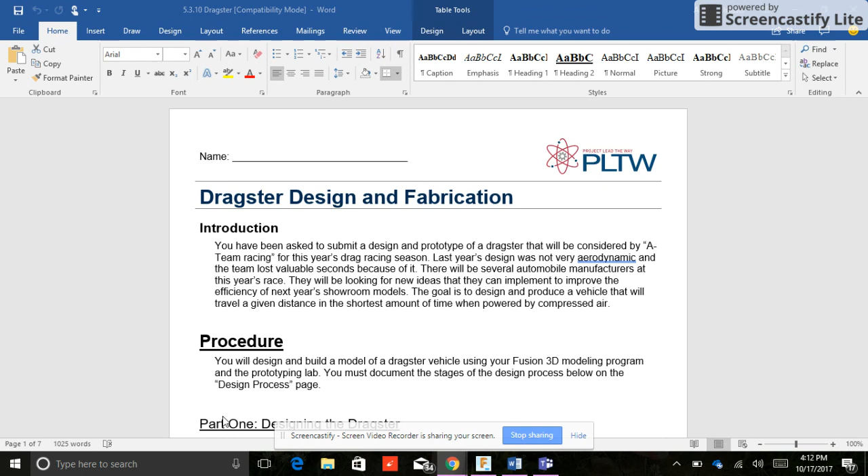So we're going to go down through our design brief. Your client is A-Team Racing. The designer is you. The problem statement is last year's model was not aerodynamic and lost valuable seconds in the race. The design statement is you're going to design a more aerodynamic dragster.

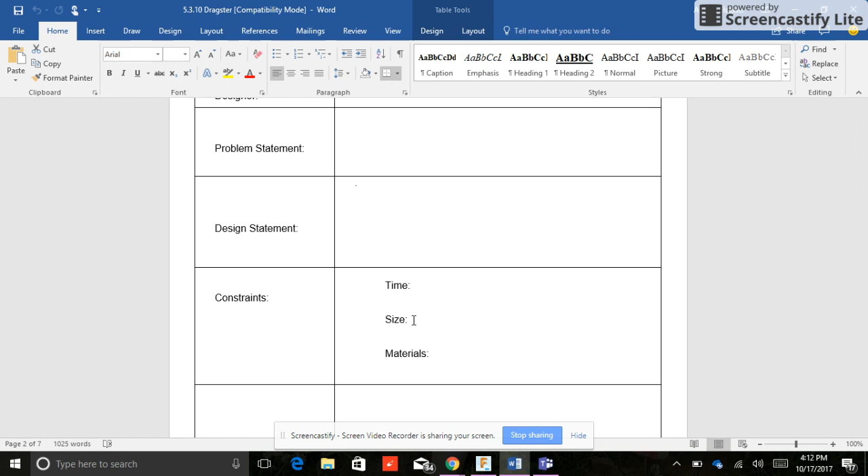Your constraints for time should be less than 2 weeks, should take you to finish this project. The size should be as small as possible because smaller is lighter and we want to be aerodynamic. And the materials are 1 block of pine wood, a couple axles, and a couple wheels.

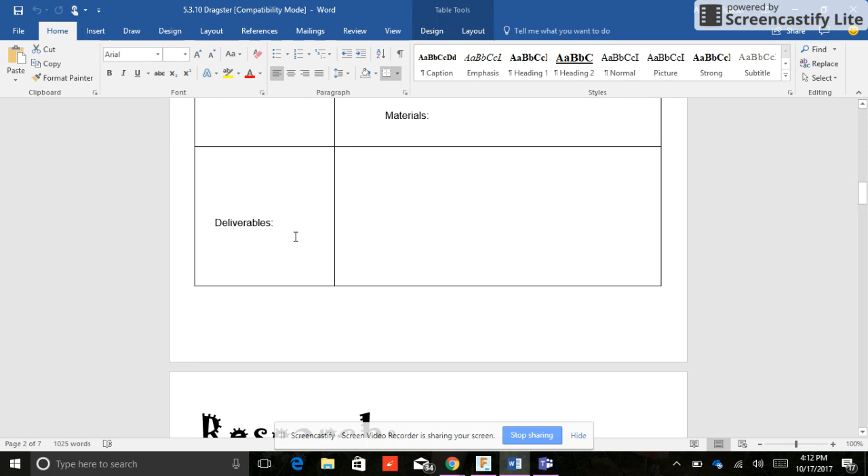So the deliverables, same as your other projects. You're going to make a concept sketch, you're going to make a 3D model in Fusion, and then you're going to build a prototype out of wood.

For research, copy and paste the URL of every website you look at. Either copy the picture or write a description of what you looked at to go with the website. If you don't have that description or a picture to go with the website, you're not going to get any credit for just posting the website. You have to document what you got from that website.

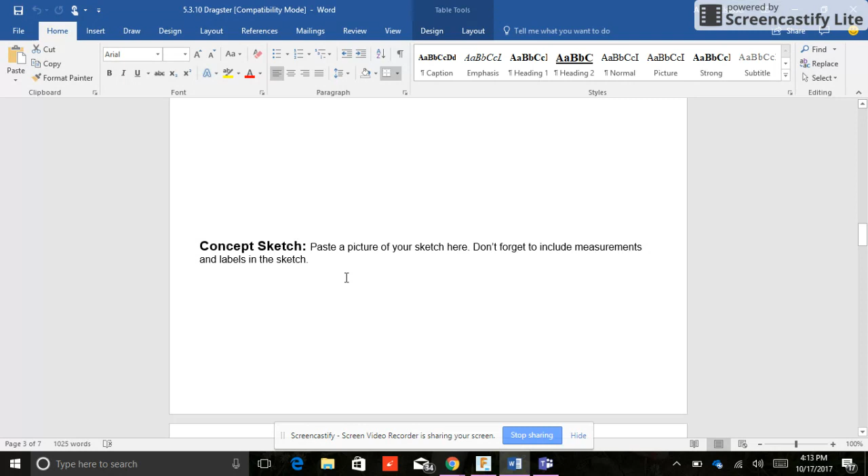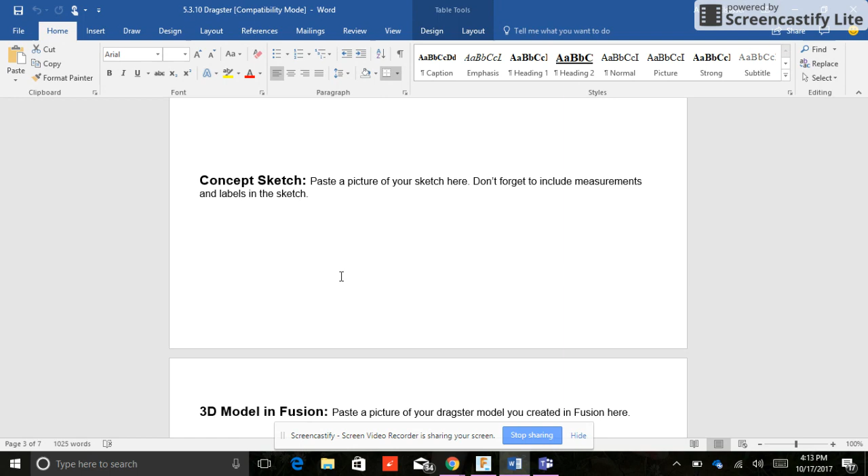Your concept sketch. After you have 4 or 5 different ideas up here under research, get a piece of graph paper, get out a pencil, sketch the dragster you want to build in Fusion and out of wood. Sketch it, give it some measurements, approximately how big do you think you want to make it, and then copy and paste a picture of your sketch here.

What I'm going to talk about now is your 3D model in Fusion and your dimension drawing. So I'm going to be going back and forth between this specification sheet, all these measurements. Some of these measurements are required. Some of them are recommendations. So we'll talk more about that in just a minute.

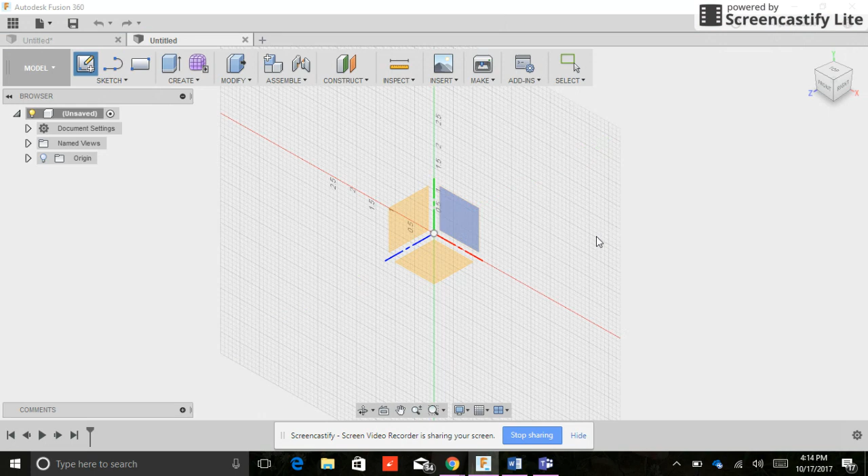Let's get into Fusion and start a sketch on the XY plane. I'm going to start with a rectangle. So R for rectangle. I want my height to be 1.25. And I'm going to click Tab on my keyboard, and I'm going to type 7 for the length. So I've got a 1.25 by 7 rectangle, and I'm going to hit E for extrude.

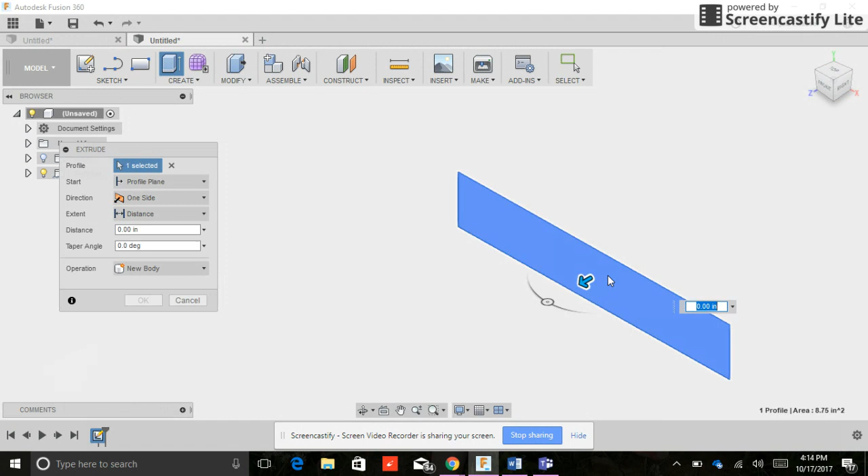When I extrude this, I'm going to extrude at 0.75. That is going to be the depth of my dragster.

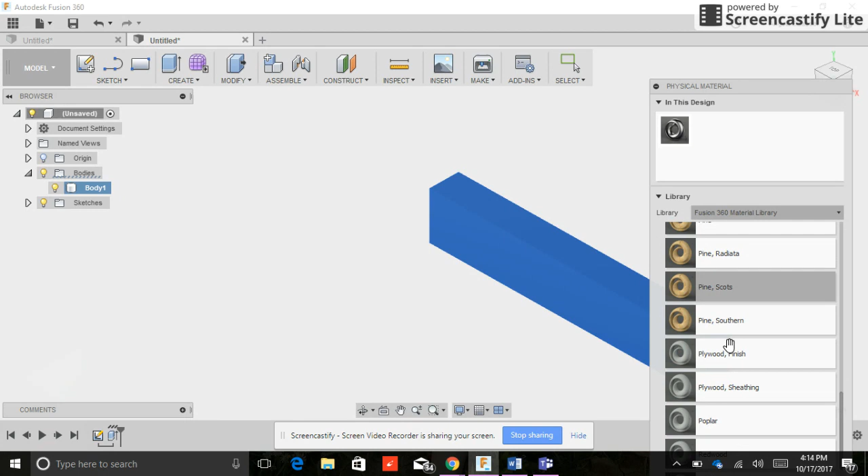Now, just to make it look more like our project, I'm going to open up my bodies, and I'm going to right-click body 1, and I'm going to go to physical material. When my physical material window opens, I'm going to go down here to wood, and I'm going to scroll down till I find pine. The dragster we're going to be building is going to be made out of a piece of pine wood. So there we go, pine.

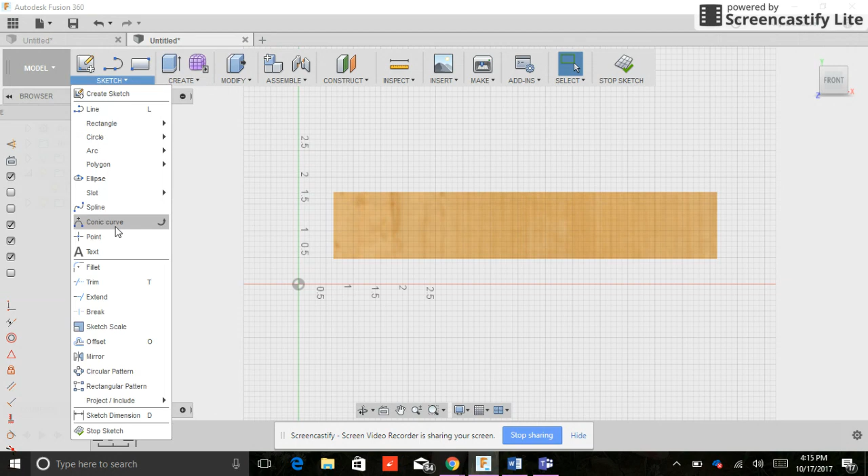Okay, now to cut my dragster out of this, I'm going to put a new sketch on top of the front face, and I'm going to use my spline tool, and I'm going to make a curved shape, and I want to make it kind of small. Then I'm going to use my line tool to come straight down on the back end, straight down, and then I'm going to come straight over to make my dragster shape.

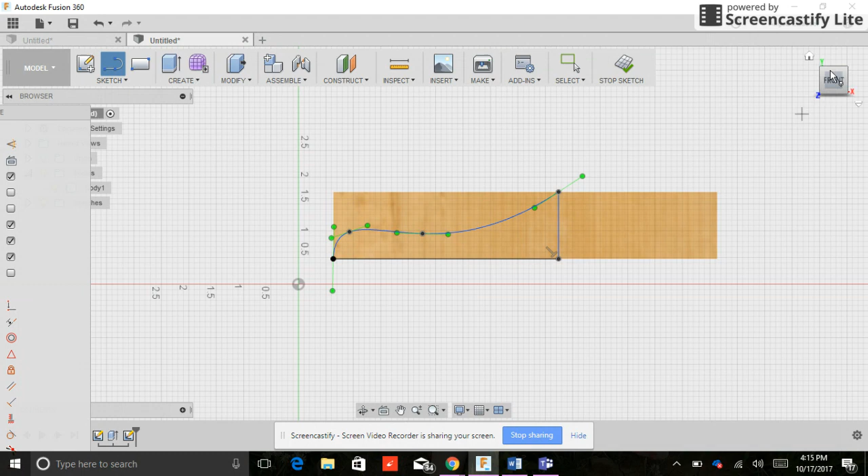Now I'm going to type E for extrude, and I'm not going to extrude my dragster. I'm going to extrude the space that I want to cut away. I'm going to push it back so that Fusion knows I'm trying to cut it out where it says extent. I'm going to change that distance to all. I want to cut all of it away, and I'm going to click OK.

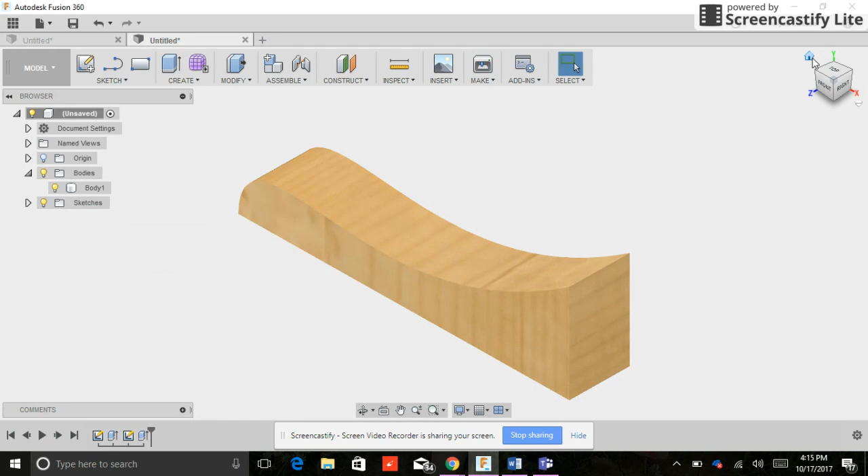Now I'm left with my dragster. So I can see that this is going to be approximately the shape I want to cut out of that wood. And I'm going to go back to my dimensions because I need to drill the holes for my axles.

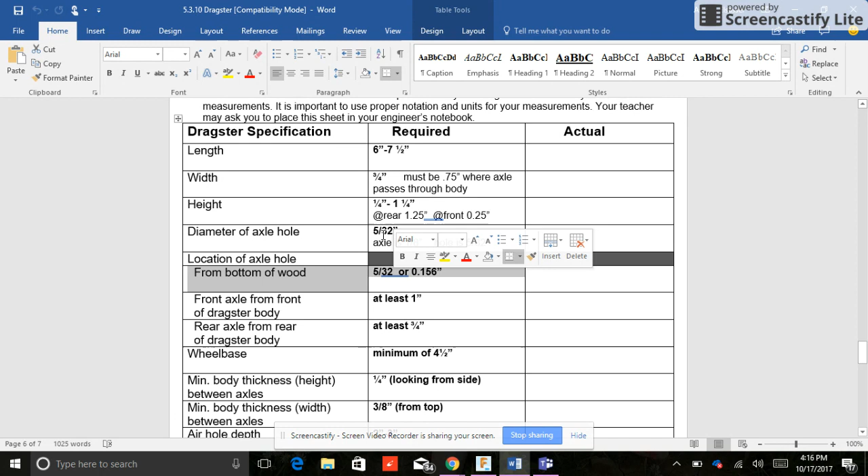I need to make sure I have room for these holes. So before I cut my wood out, before I drill any holes, I'm going to drill it in Fusion to make sure that it's going to work. So the diameter of this axle hole is 5/32. And from the bottom of the wood, it should be up 5/32. So that's easy. 5/32 for the diameter, 5/32 for the distance from the bottom.

So when I go to create a hole, I'm going to click on this face. I want the diameter of this to be 5/32. And I want it to go all the way through.

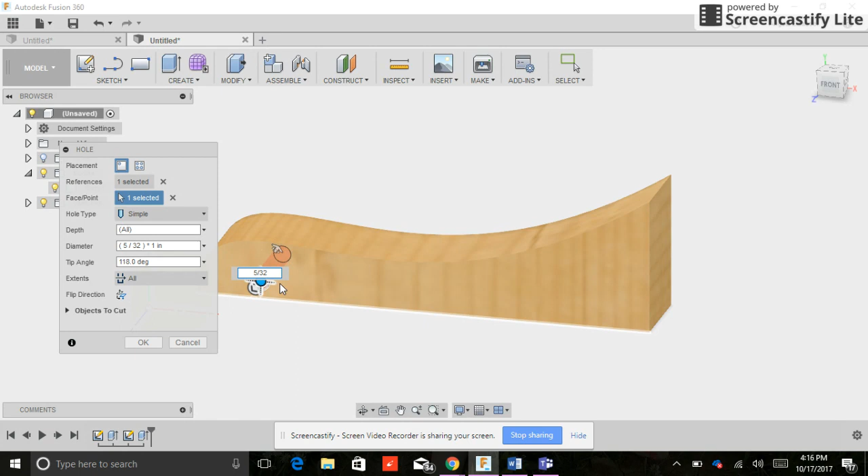So I'm going to change it from distance to all. And my references, I'm going to select the bottom of my dragster. I also want that reference to be 5/32. The reason this is important is because both of my axle holes—and I'm going to create the other one now—both should be the same distance from the bottom of my dragster. If both axle holes aren't the same distance from the bottom, my dragster is going to be uneven.

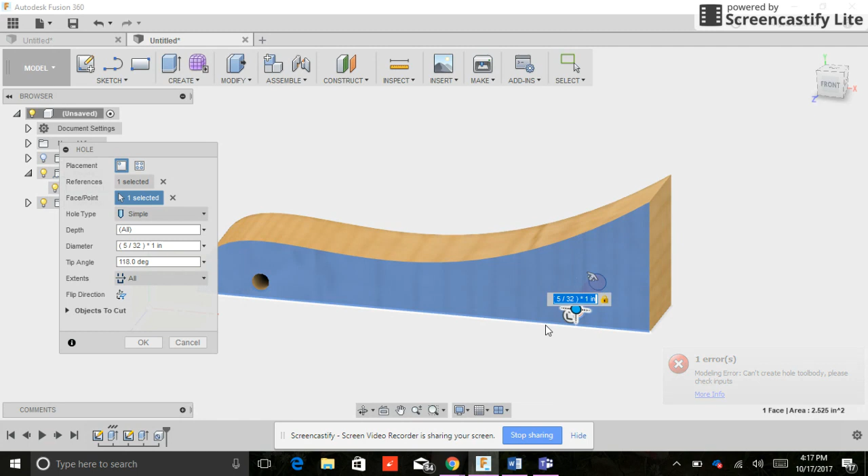It's not going to race very well. So this axle hole back here, I want the diameter to also be 5/32. I want it to extend through the whole dragster, so I want it to say all. And for reference, I want it to be 5/32 from the bottom. Enter. There's my two axle holes. Now, if you notice, they go all the way through. They're nice and level. Everything is good.

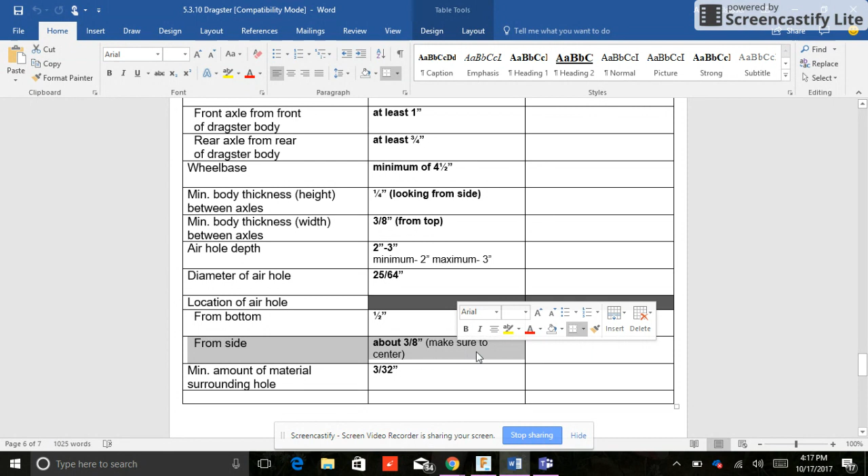The next measurement that's really important—all these other measurements are recommended, not requirements. The air hole diameter is 25/64. It should be 1/2 inch from the bottom and 3/8 of an inch from the side of the dragster. So when I drill this hole in the backside, I'm going to create another hole, and this is for my launch. If this hole doesn't work, my dragster is not going to race at all, it's going to be ruined. So the diameter needs to be 25/64.

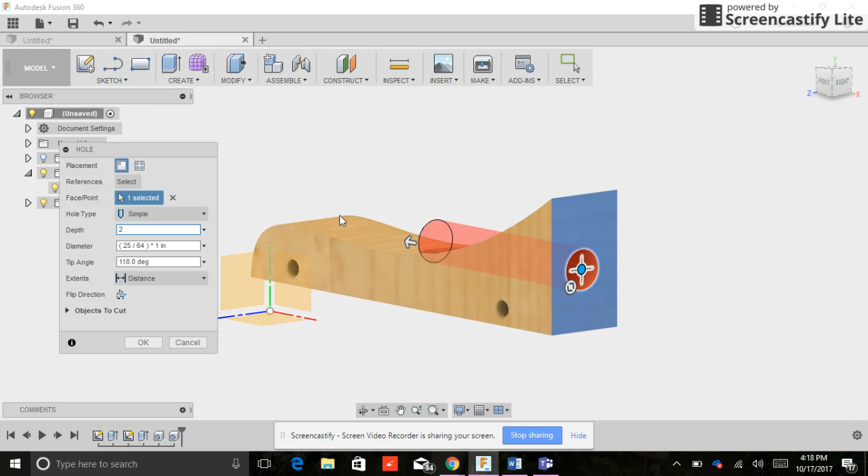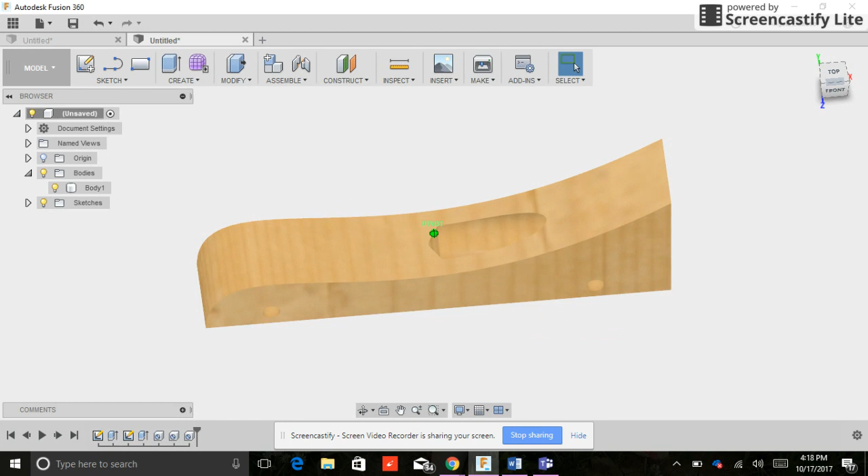The depth, we want this to go about 2 inches if possible. I'll talk more about that in a minute. And I want to reference from the side 3/8, and I want to reference from the bottom 1/2. So once I've got this all typed in, I can see that my hole is going to come out the top of my dragster. That is bad.

If my hole is not completely contained by the wood, then my dragster is not going to race. So I can do two things. I can make the hole not go as deep, which will make my car not race as well. If my hole isn't as deep, I won't get as much force from the launching system.

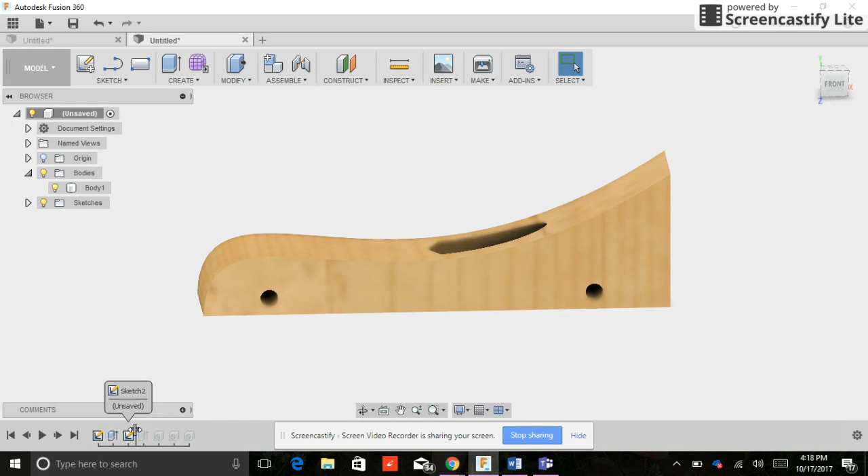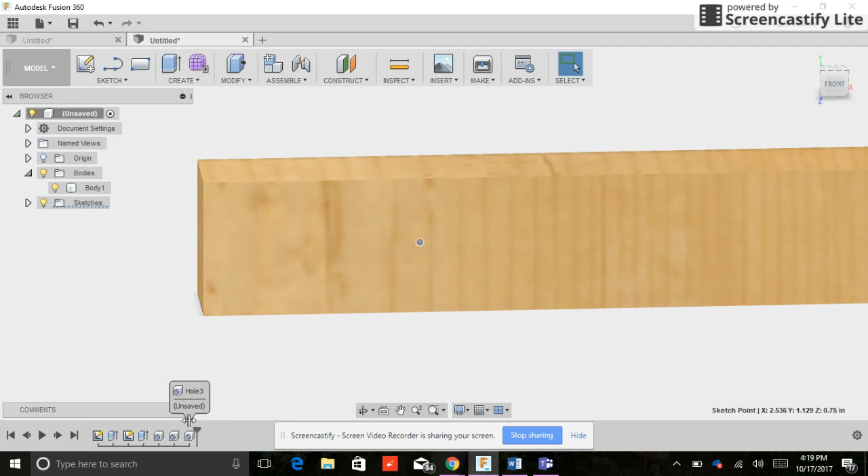Or down here at the bottom, I can scroll back in my work tree and look at my dragster and change this profile. I can give it more space. Let's see what that does. If I click Stop Sketch and open these back up, I'm still losing a little bit of my shape.

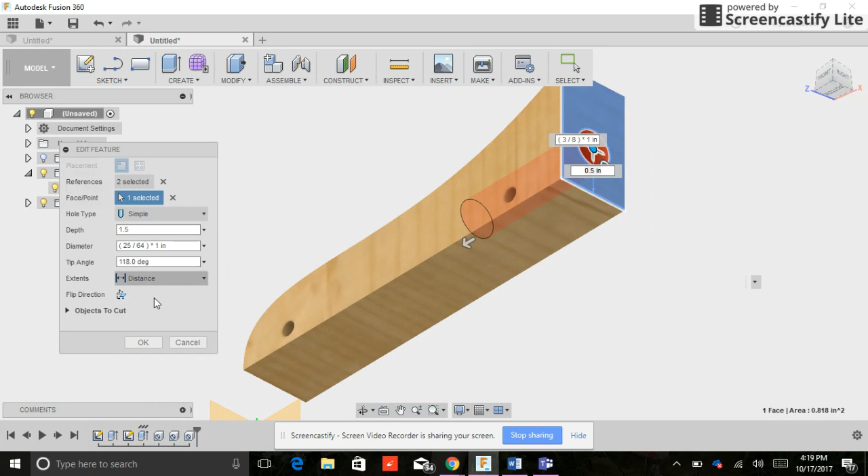I'm going to open up that hole. So down here at the bottom, I'm going to double click that hole. And instead of 2 inches, I'm going to try and make it 1.5. Okay, now I can see my 1.5 inch hole is totally inside the wood. I'm going to click OK. And that's better—my launch hole is totally inside the wood.

And I'm going to do one more thing. Down here on the video monitor, these are display settings. So I'm going to click on display settings, go to visual style, and go to wireframe. If I look at this from the front, I want to make sure my launch hole and my axle hole have plenty of room and that they don't overlap. If my holes overlap, my car isn't going to race—I can't put an axle and the launching system in the same hole. They cannot overlap, and my launch hole needs to be completely inside my dragster. So this looks pretty good.

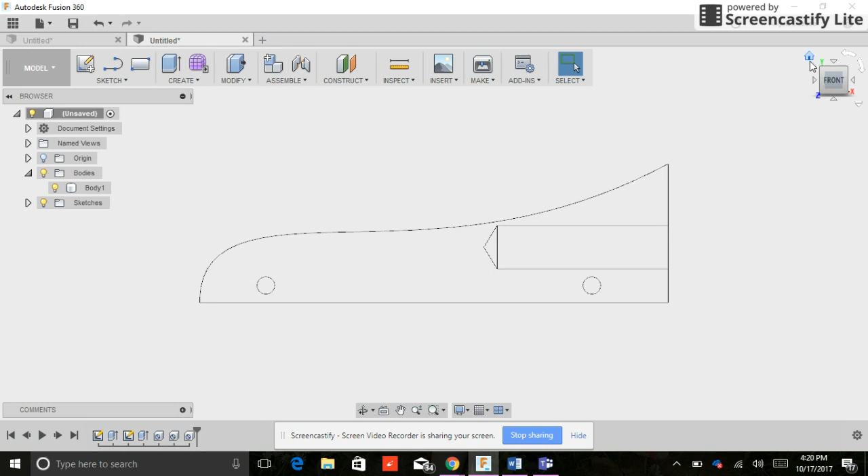I'm going to go back to visual style and change that back to shaded. Now I'm going to save my work. I'm going to call it Dragster. And up here where it says model, I'm going to click that drop down menu and go to drawing from design.

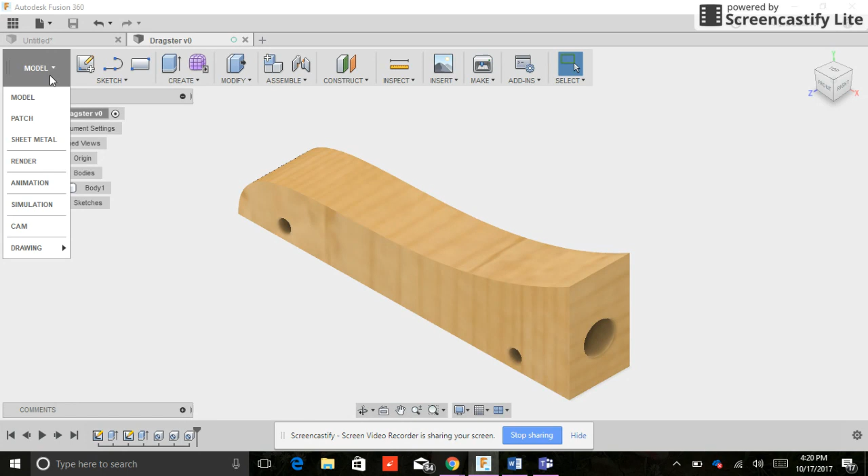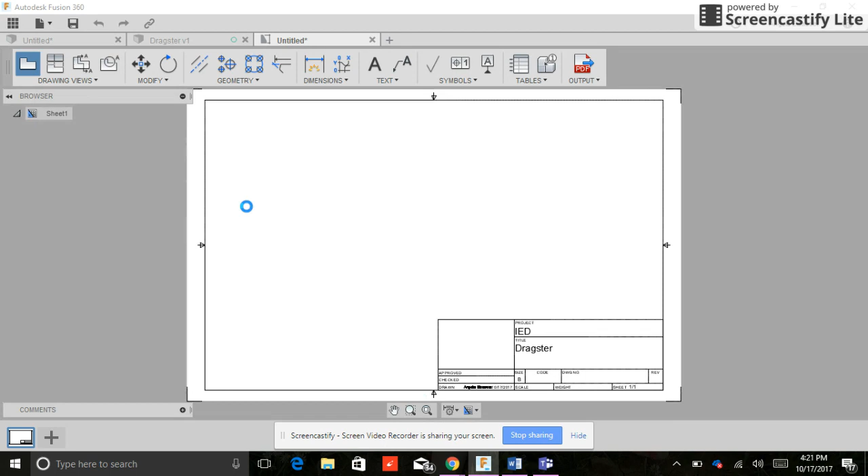Okay, so when it loads my drawing, this is where I'm going to make my orthographic projections. I'm going to make the front view, right view, top view, and the isometric shaded view. I'm also going to add dimensions. So when I click on—it's still loading. Here we go. So up here at the top in drawing views, when I click on base view, there's my dragster. It's giving me a 1:2 scale. We want a 1:1 scale.

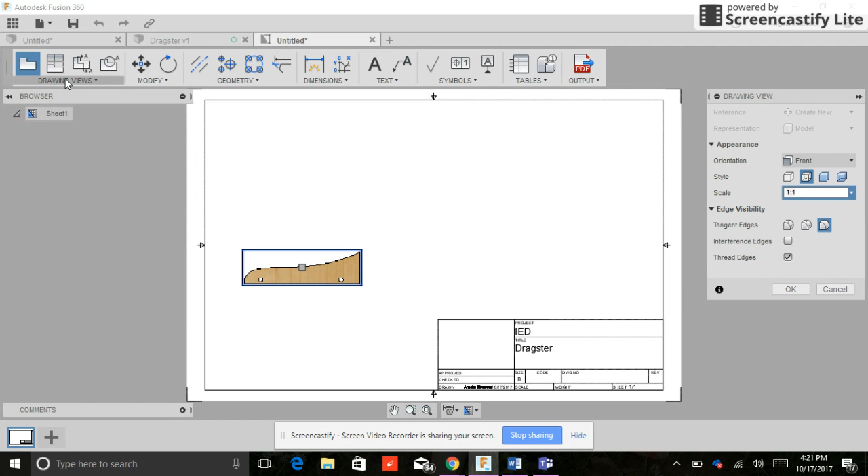Always make sure your scale is 1:1 because you're going to cut this out. So click your front view, and then up here where it says projected, we're going to click on our front view and come over here to project our right view, our ISO, and our top view. Right click, okay. I'm going to add dimensions.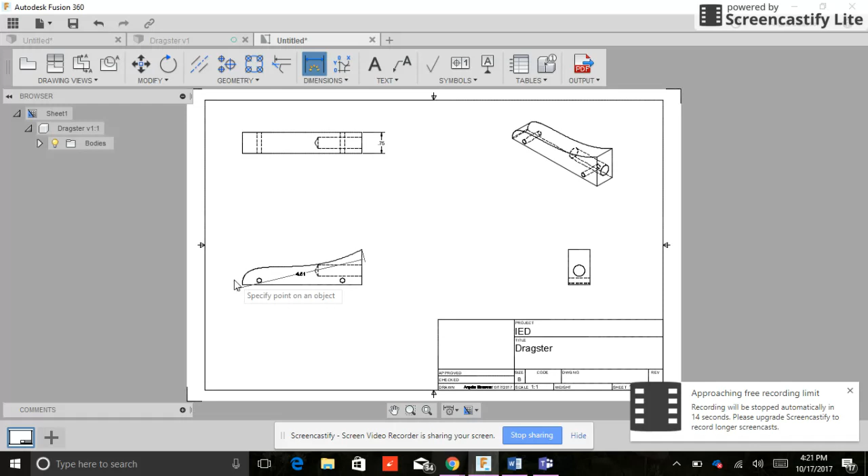I'm going to go top to bottom and pull out my depth. I'm going to go right to left and pull straight up—make sure you come straight up, there we go—straight up for my width, and top to bottom straight over for my height. There's my dimensions.